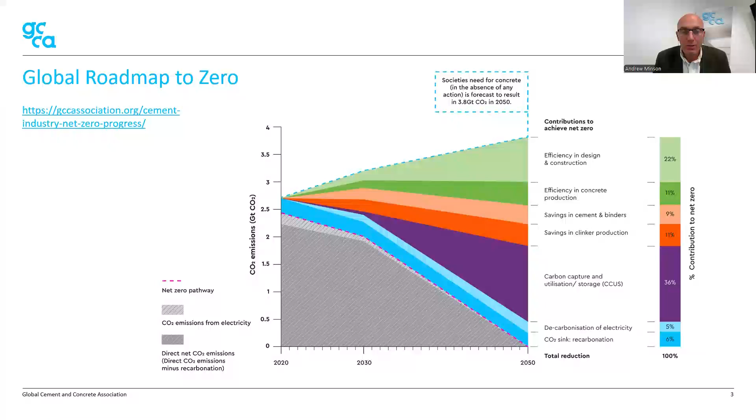So all of this gives you the context of the carbon accounting that I'm about to move on to, which is obviously a really important part of being able to measure performance and also being able to drive demand for lower carbon products. So if we go on to the next slide, we can just see a document that the Global Cement and Concrete Association has really inherited from our forerunner. We've existed for 6 years, and we essentially have grown up out of an organization that was under the World Business Council for Sustainable Development. And you can see their logo on the bottom left of the report on the right.

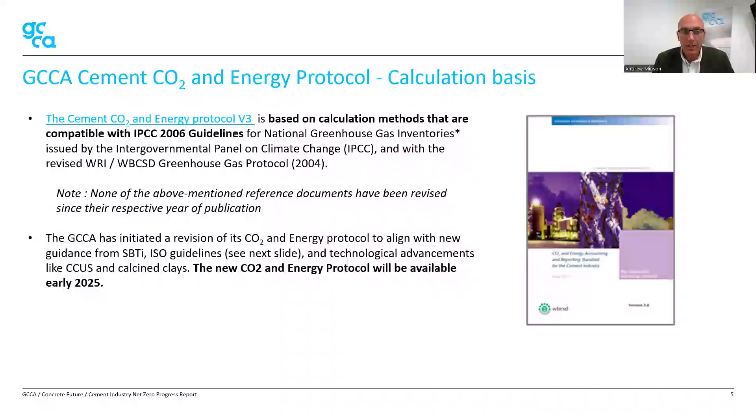So this cement CO2 and energy protocol is based on calculation methods that are compatible with IPCC guidelines. And the 2006 date, it might seem a long time ago, but the documents that our protocol is based on, those reference documents have not been revised since their publication. And so that's the document that we're currently reporting against. You also want to hear about what the progress is. Well, we've initiated a revision of that protocol to align with latest guidelines, including ISO guidelines that you'll see on the next slide, and technological advancements.

Back in 2014, I think when that was published, CCUS was far off. We weren't talking about hydrogen. We weren't talking about calcined clay. So the revision to our CO2 and energy protocol will be aligned with the relevant ISO standards and will take into account the new technologies that will get us to zero. This protocol is scope 1 and 2. So separately, we're doing some work on scope 3. We all know the importance of that.

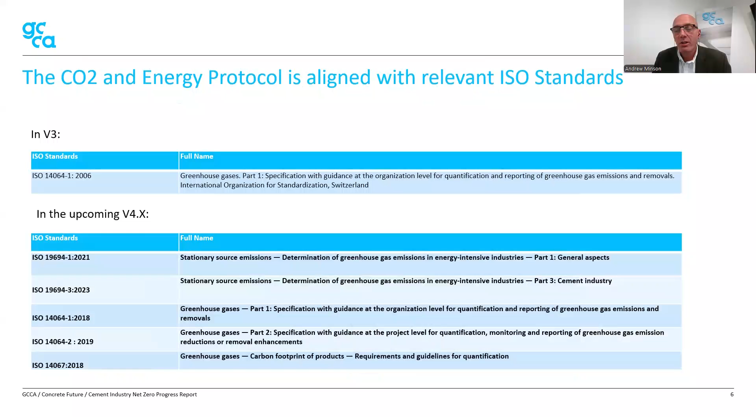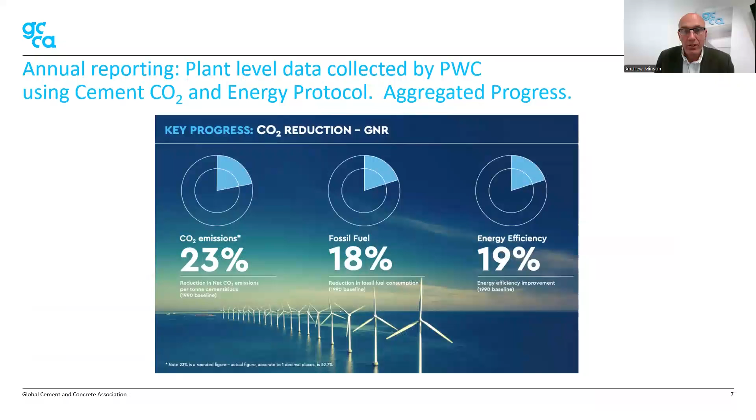So if we go on to the next slide, apologies. Just a quick update on progress. So if we go on to that slide with those percentage reductions, using the CO2 and energy protocol, we use PwC as a third-party auditor to collect data from cement plants from around the world. They aggregate that data to give us our annual progress in our CO2 emissions, fossil fuel reduction, our energy efficiency in the manufacturing process, and a whole lot of other parameters as well. They're just the three headline ones we often use to communicate what the progress is of the industry.

So if you go on to the next slide, you can see that Scope 3 is something that we also want to be able to report on in the future. So we need to have guidance on that, and we're developing that document based on the Greenhouse Gas Protocol Corporate Value Chain Reporting Standard.

So we base our documents on essentially overarching documents that set the parameters. And so for all 15 categories of emissions for Scope 3, we'll provide the guidance and essentially the rule book by which cement companies should report their Scope 3 emissions. And we're just releasing that this month to our members to test that, to make sure that it's effective and works.

So I've been talking about cement so far. Now, cement is obviously the powder that goes into the concrete. For emerging economies, cement, the powder, is the product that goes onto the construction site, and it's mixed into the wet form, which then hardens on the construction site. In more developed countries, that process of mixing concrete has been industrialized, either in ready-mix plants, and it goes by truck in a wet form to the site, or it's cast in a factory, and in a hard form it goes to site. So both the cement powder in emerging economies and the concrete product in emerging and in developed economies is what goes on to the project sites.

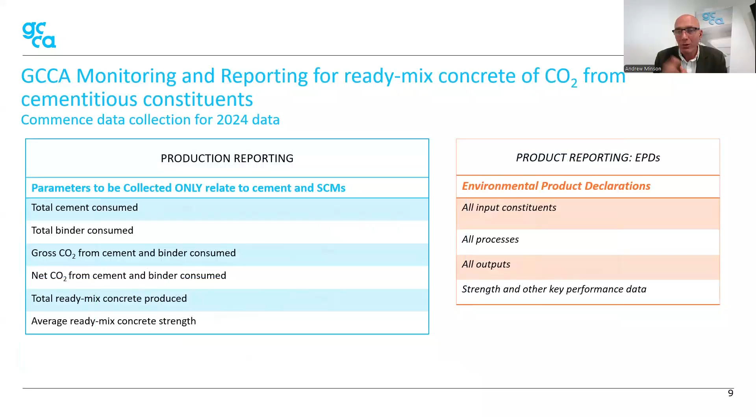And the reason it can be like this is because at product level, only very few products, relatively speaking, are having an EPD produced on them. That level of detail by the industry has only been going into on a small amount of products. So diagrammatically on the next slide, I just want to show this contrast. I've done it again. I forgot the ISO standards. EPDs are all based on ISO standards. So on the right-hand side, we've got EPDs. And on the next slide, we'll see all the ISO standards that are relevant for both cement and concrete.

There's a slight difference. On the top, we refer to them as international standards. They're actually the European suite, which is used basically internationally. And on the bottom left is a North American suite of documents as well. These are the ISO standards. These are the rule books for how you produce an environmental product declaration.

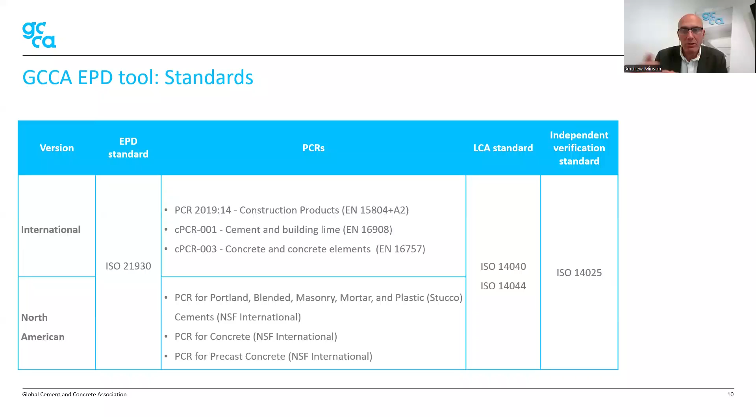And just to give an indication of the maturity of this, we as GCCA, for the producer members and actually for non-members as well, have an EPD tool, an online software tool that makes it very straightforward, that takes the complex rules in these ISO standards and has it in the background in the software. The companies can put in their parameters for their product and they can produce an EPD. So we're making it very cost effective for EPDs to be produced for both cement and concrete. If we go on to the next slide, we'll see in diagrammatic form what I'm trying to say about the difference between product and production.

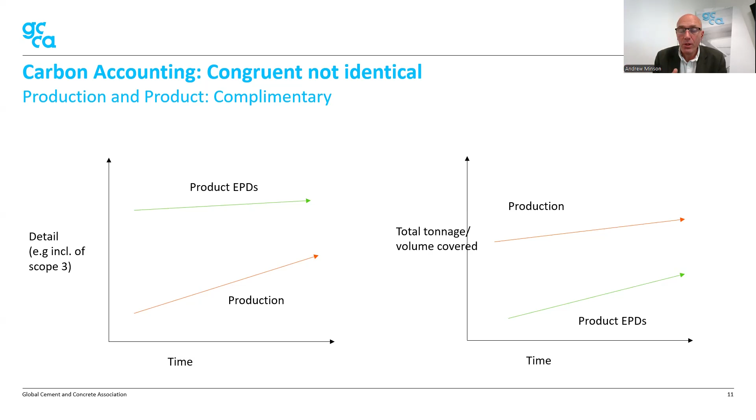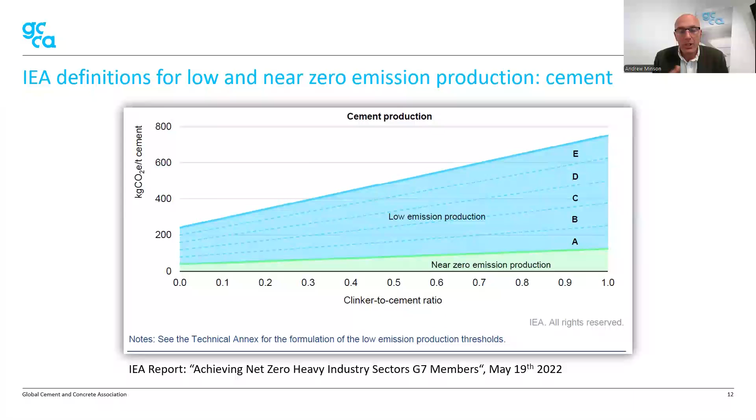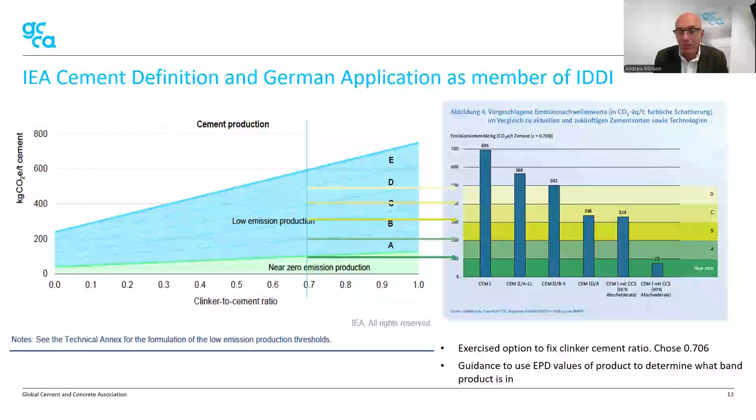So the definitions on the left, and even the definitions on the right as interpreted in Germany, as yet don't say what the targets are. But then you can impose a target and say, by a certain date, we want a certain percentage of our product to be in a certain band. So this is the cement story. So let's see what the concrete story might be. We go on to the next slide.

The key bit on concrete is that its strength is a differentiator. There's lots of other performance parameters, how long the concrete might last, or whether it can be used in ground conditions that might be particularly acidic, various other reasons. But the primary differentiator of the embodied carbon of a concrete is the strength. And so this is a credible, effective, not too complicated way of categorizing concretes and banding them into different CO2 strengths.

And we would hope that this definition, this methodology, will be adopted by IDDI to enable procurement of low carbon product to have definitions that can be applied together with targets. So the industry and the public and private sectors know what the direction of travel is, what the trajectory is on decarbonisation of concrete and cement.